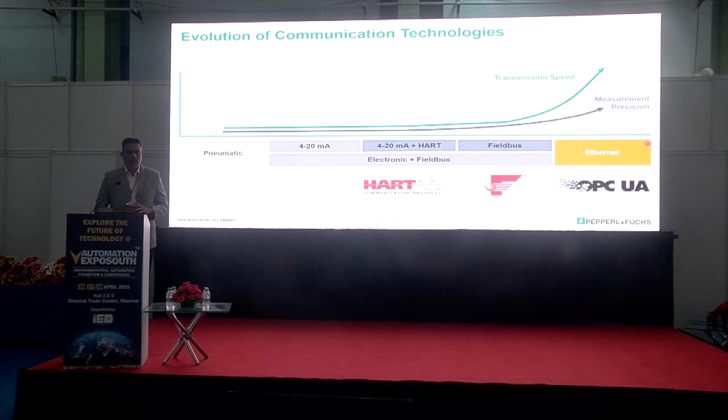This is a measurement of speed as well as measuring precision. With pneumatics, we had the starting point, with a certain transmission speed and measurement precision. As we progressed towards digitization, the precision increased, and the transmission speeds also started increasing. But with Ethernet APL technology, we are going to see a multi-fold increase in both the measurement precision and the transmission speeds.

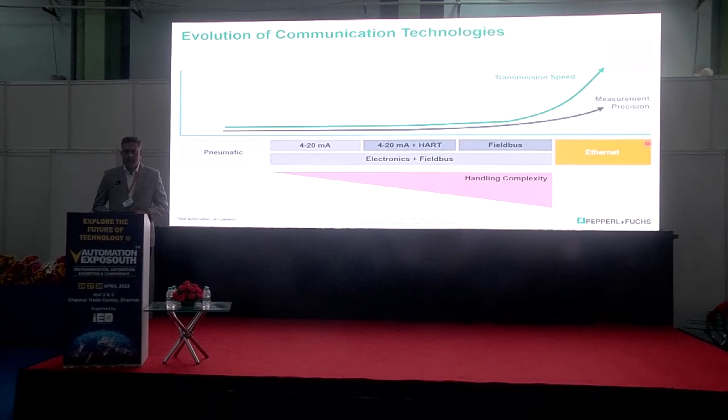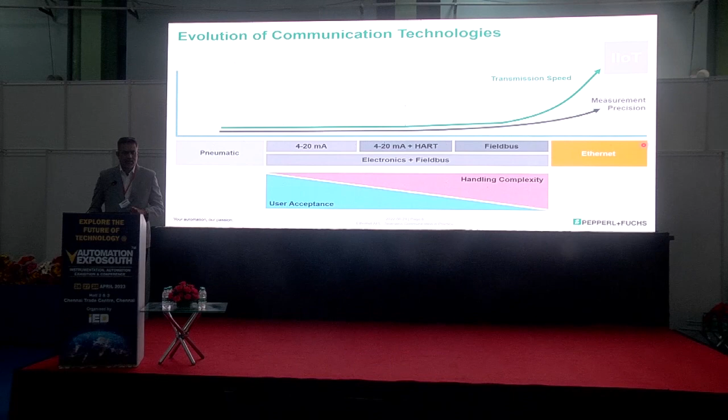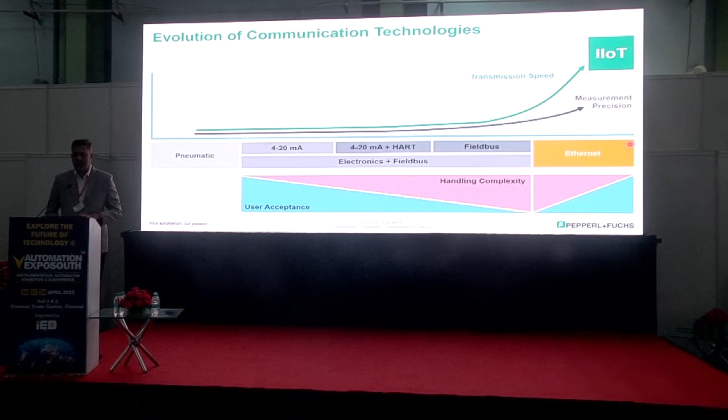As we progress technologically, the handling of devices and instrumentation started becoming complex. The user acceptance for digital technologies is going down. But with this Ethernet APL, we expect the complexities to reduce and the user acceptance to increase.

How do we do it? What are the parameters? That is what the next few slides are going to show.

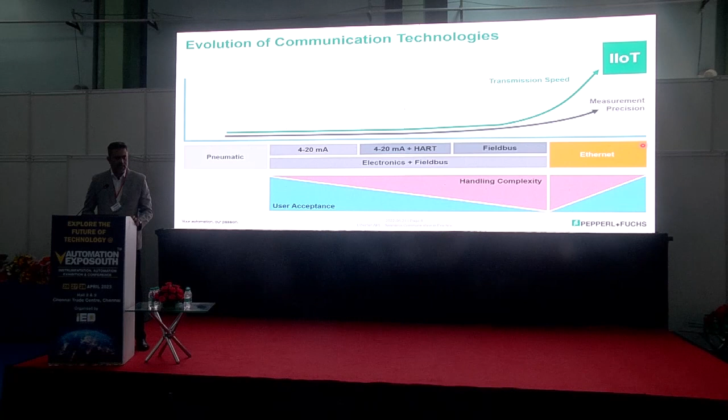So why was Ethernet not used? Industrial Ethernet has been around for the last 25 years. Why was it not used in a process control environment? So what are the process industry requirements?

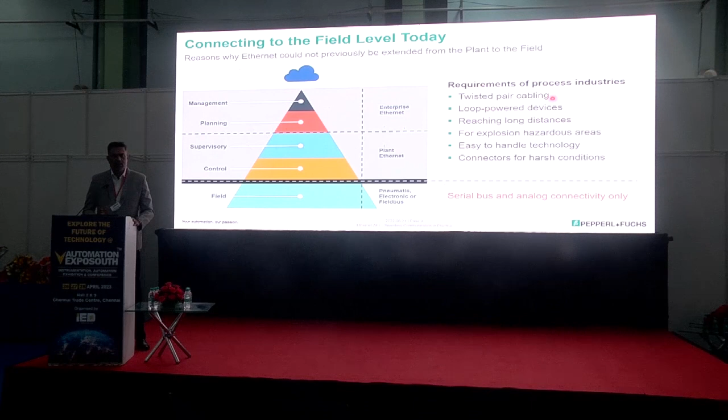We need to have twisted pair cabling. Loop powered devices are required. It has to reach long distances. It should also be able to be used in a hazardous area, that is in hazardous explosive areas. It should be an easy to handle technology, and the connectors should be suitable for harsh conditions. So this is the way we connect the devices today in a process network.

60079-47, two wires, that is called two-wire intrinsic safe Ethernet. So with these profiles, we have an industrial or commercial Ethernet converted to be used in a process industry, called Ethernet APL.

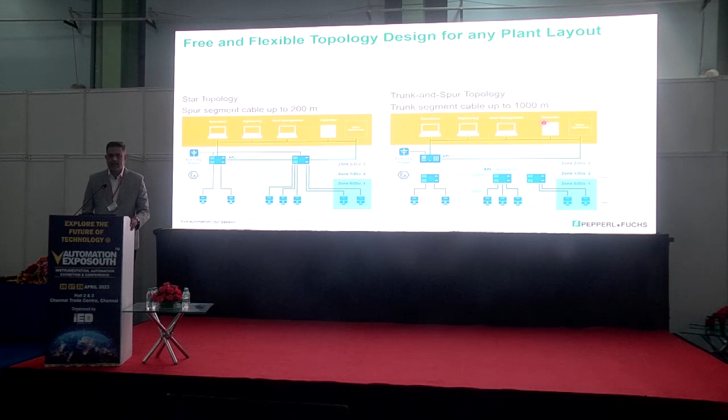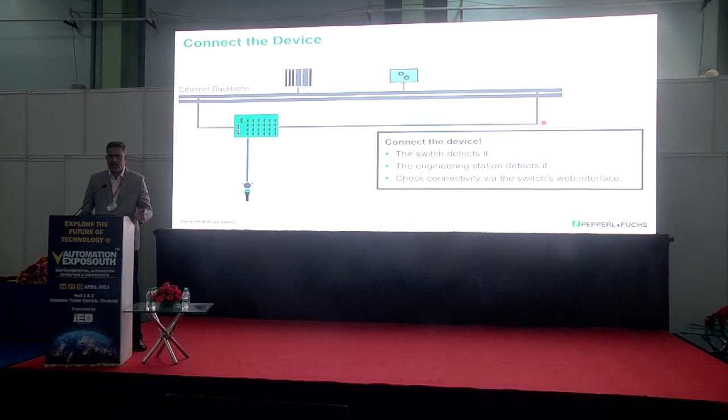No special DCS software is required. It's all coming on a web interface henceforth.

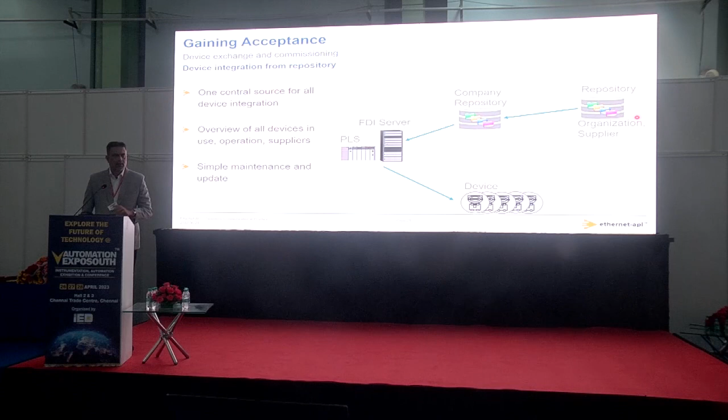It's gaining acceptance among the end users. For device integration, you have a complete single repository you can access on the Ethernet. It is used for all devices in operation as well as in use. Simple maintenance and update of the database of the field devices. So the complete device fleet can be managed in a quicker way.

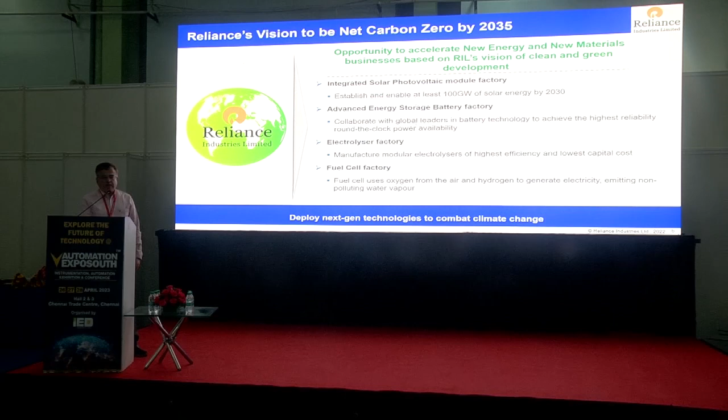We'll talk about Reliance's vision to be net carbon zero by 2035. We are putting up a solar photovoltaic module factory at Jamnagar. We are putting up advanced energy storage, battery factory, electrolyzer factory, and fuel cell factory at Reliance Jamnagar to become net carbon zero by 2035. These are the growth engines of Reliance.

Now we'll come to the technical points. We'll discuss the Reliance pain points and why we joined OPAS. As you are aware, we have multiple refineries, petrochemicals, and polyester sites across the western region of India. We have around 5,000 plus control systems working across these sites. So what were the problems we were facing with these control systems?

One is digital transformation. As we move ahead with digital transformation, it requires a lot of data from the OT system. What we found is legacy control systems are constrained because they are not able to provide the data at the required frequency and number of data points to the cloud to manage predictive maintenance or early event detection. New features cannot be introduced in the legacy system - suppose if you want to add a multivariable controller into the legacy system, it is not possible. So you have to add on some applications, or upgrade the control system.

The third point is related to frequent obsolescence of Microsoft OS. As you are aware, OS obsolescence is a big issue for OT control systems. Once it is declared obsolete, we don't have patches available for cybersecurity purposes. Then if we want to upgrade the control system, we have to upgrade it with every obsolescence of OS, and that period comes to around 5 to 7 years based on our shutdown frequency. If you upgrade all control systems in every shutdown, the capex cost is very high, and it demands that profitability is going to reduce.

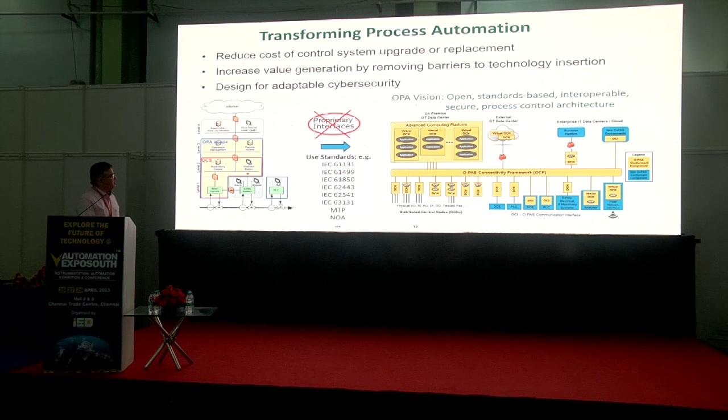So we have 100 members in the open process automation forum, with 20 plus hardware and software suppliers, 5 major DCS suppliers, 10 end user collaboration partners, and out of those 10 collaboration partners, 7 have already announced a test bed facility.

So what are the versions which OPAS has already released? Version 2.1 is the latest, which was released in 2022. Version 1 was released in 2019 with interoperability as the theme. Version 2 was released in 2020 with configuration portability as the theme. Version 2.1 was released in 2022 with control functionality as the theme.

And version 3, we have already started work on, which is going to be released either at the end of 2023 or next year, with application portability, orchestration, and physical platform as themes.

So what is application portability? It ensures end users have the ability to move their apps, whether customized, custom development, or vendor provided, from platform to platform, as well as to use any process automation software regardless of vendor. So the basic theme is, if you want to upgrade one HMI to another platform, you just take a backup and reload it into another vendor's station.

That will be completely vendor agnostic. System orchestration ensures the ability to select and implement OPAS certified products from multiple suppliers, and to be assured those products will coexist seamlessly in a unified open process automation system.

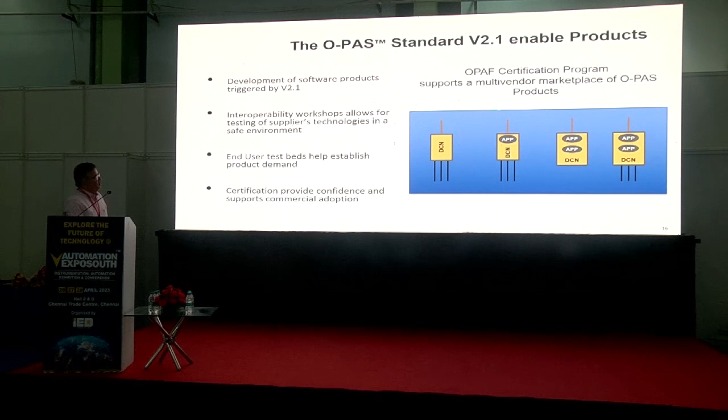So OPAS certification program supports multi-vendor marketplace for OPAS products. This is going to be released, I think, in July 2023, the first phase of OPAS certification, where formal validation process is going to be managed by Open Group, and they are going to put up third-party labs accredited by Open Group to test out the open process automation devices. Products that demonstrate conformance to 100% of the OPAS requirements receive certification and will be listed on the website.

So there are multiple interoperability tests organized by the open process automation system. There were two such events which have already taken place—one in 2019 and the second in 2022, wherein vendors sit together and test out their devices for interoperability and interconnectivity. Based on this test, they modify either their product or give input to the standards for any update or modification. 14 organizations participated in this 2022 interoperability event.

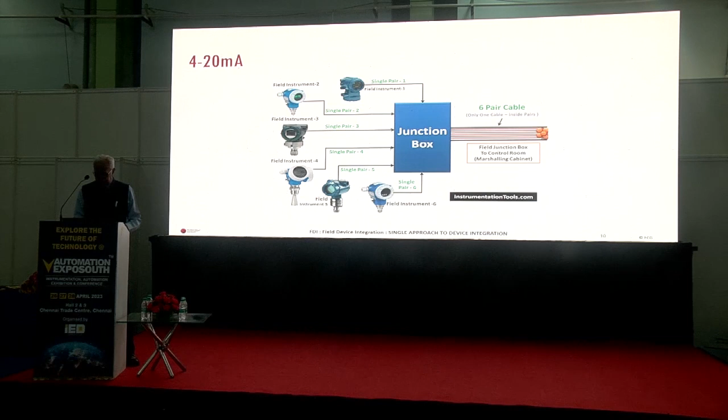Then came the days of field bus. Many devices were interconnected on the standard 2-wire cable, which was being used to power them and also to take the signal. So you had foundation field bus, Profibus, and many other standards in the play, but of course, FF outplayed many of them.

Then came the era of wireless devices, where many devices were connected to each other wirelessly, and through a router the data was sent to the control room. This was by and large for the monitoring application. Technically and technologically, it is possible to do control, but nobody would dare, because you do not want to take a chance with a process plant.

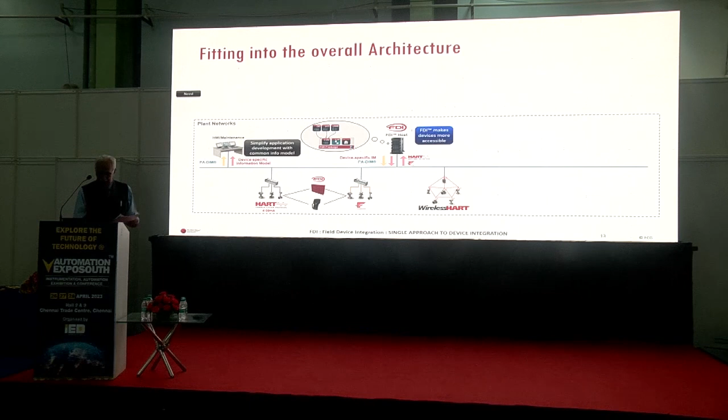And therefore, by and large, this wireless technology was used for monitoring. Now comes the bigger picture: we already have devices which were on HART or current, you had foundation field bus, you have wireless HART, but you have to integrate all of them. And when you integrate all of them, you need many things with each of the devices.

So the devices that you see here are basically from so many vendors. Reliance, Devyang talked of so many control systems, almost 2,000 plus controllers in their field. Now there are so many devices, so many control systems, all coming from different eras, different timelines, different manufacturers, different technologies, all needing to be integrated. And therefore, the need to have one system.

And remember the fact that no manufacturer or user would ever like to throw out their legacy system. It's a misconception that you can come up with a new one and throw away everything else. It doesn't happen. Whether it's a brown field or a green field, you will always see a hybrid system where you will have a mix and match of many such systems put together.

All the reason for having a good device integration. I think Devyang also talked of why do we really need these standards, why do we really need to work with this kind of new technology. Obsolescence of the Windows platform.

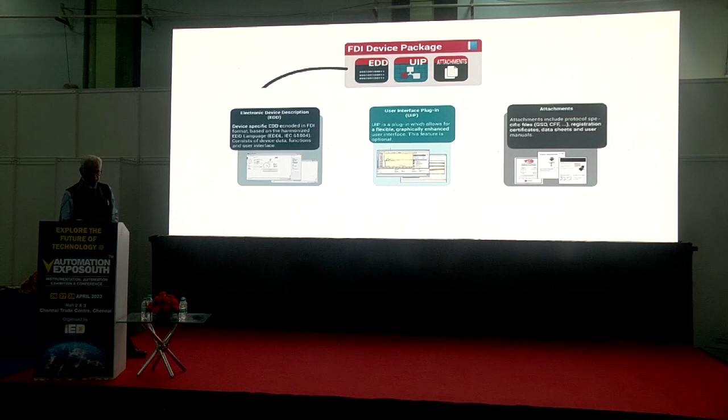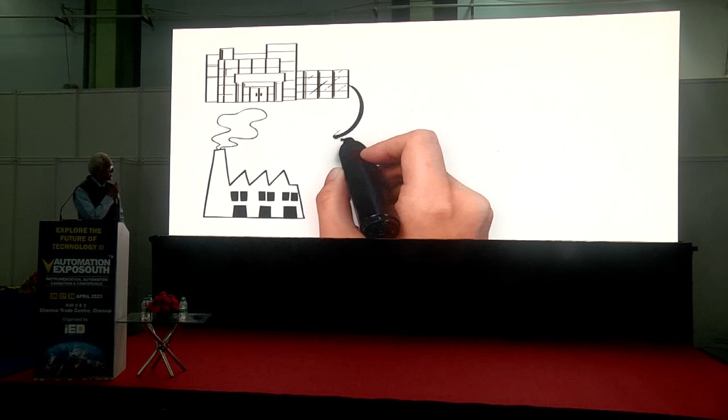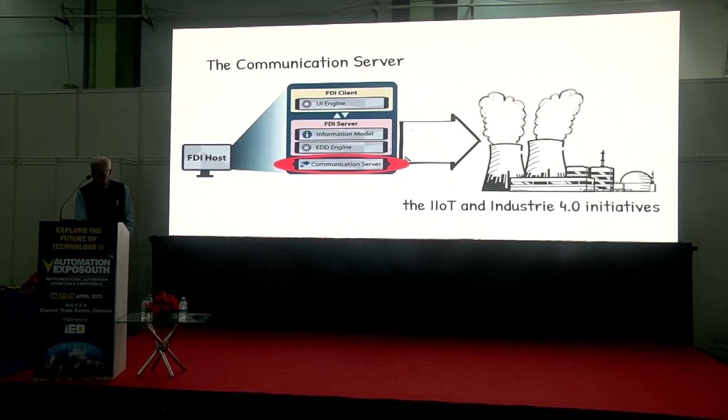FDI is an internationally standardized solution for process automation, device, and systems integration that dramatically simplifies software installation and maintenance, as well as communication between enterprise-level systems and technologies on the plant floor. Before FDI, individual devices often came with hundreds of files to address different systems, configurations, and interfaces. With FDI, a single device now uses one file to provide data and process values to all systems. An FDI system is made up of two parts: an FDI device package and a host system. The FDI device package is a standardized container of all files necessary to describe a field device to a system and a person, including the device description, user interface, and device documents such as wiring diagrams, manuals, certificates, etc. All of these elements are packaged together in a digitally signed FDI device package. An FDI host system in process control can be a DCS, PLC, an asset management application, or even a configuration tool. FDI host systems are made up of an FDI client and an FDI server. FDI hosts may also provide an OPC UA interface to field protocol communication servers, allowing disparate machines and systems to communicate. The communication server is the key element enabling FDI to be broadly adopted into IIoT and Industrie 4.0 initiatives. In particular, the server enables local or cloud-based OPC UA connections, which simplifies integration with existing IT infrastructures. FDI and OPC UA deliver access to plant data from across the globe, allowing corporate offices and subject matter experts to optimize assets and stay ahead of the competition, all while providing built-in data security. FDI and OPC UA enable the digital transformation of process plants to work more efficiently and effectively with fewer resources and tighter constraints.

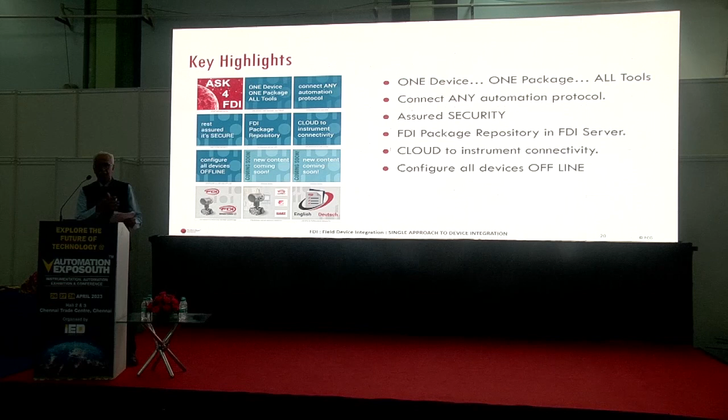The key highlights of this presentation are that you will have only one package for one device, not many, and no version numbers are required. The latest one would be downwards compatible, and anything coming from legacy systems would need to be incorporated, connecting to any communication protocol. We saw that whether it is Foundation Fieldbus, Modbus, HART, HART IP, wireless HART, or even Profibus, all of them would be contained in this one device driver package called the FDI. The FDI server, which is in the plant itself, would be a repository for all these drivers, and once connected, it picks up the data from the relevant FDI and takes it forward.

So are there host systems? Yes, there are many host systems like Emerson, ABB, Yokogawa, and many others already there. Many of these host systems are also now certified by FDI. You remember that tick mark with the FF devices? You're going to see the same thing with host systems and field devices, that this FDI is an approved and attested one from the FieldComm Group, which means you have seamless integration, seamless interoperability, and many added advantages compared to the integration challenges you normally face in the field.

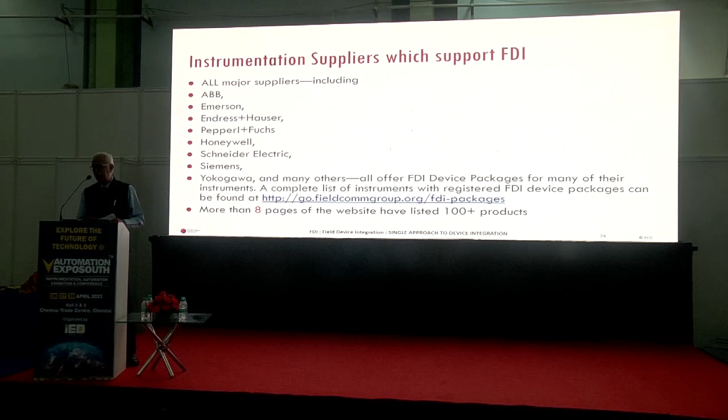Is it new, or is it only one company actually doing it? Not really. There are almost about 100 companies really into the field, into the testing labs. And for that matter, many of them have even been, you can see here that there are many of them

which are already registered with the FieldComm Group, and the testing is going on for many other host systems as well. Just some examples that many of these systems are already FDI certified. Now, this is something we just talked of a little while ago, where the data of the device, the FDI package, would come to the FDI server, a net-based server, an HTTP server, from where the data can be picked up either by the client for data analysis, for the cloud, or whatever. So just one FDI server will be able to take care of all the integration needs for a plant.

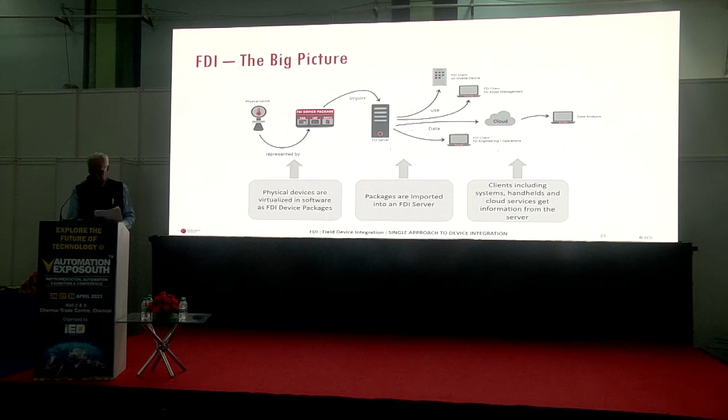The core of the FDI has 3 packages, something that you saw a little while ago. The EDDL, which is basically the machine language, tells you what the device is all about, what data it's going to give out, in what format it will give out, in what bits it will give out. So all the technical data is given by the EDDL, the electronic device description.

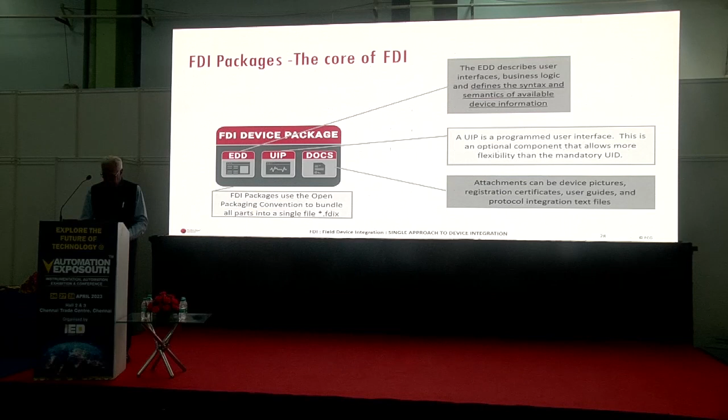The UIP is basically the software interface. If you have seen radar devices, or time-of-flight devices, you get what are known as envelope curves, reflection curves, or even for a valve, you get the signature of the valve. All those graphics will be available from this UIP package. And of course, no need to keep the manuals, no need to keep the CFF files, no need to keep the other GSD files. All the data will be available from the DOCs. That is, all the hardware data about that particular device will be available at every point of time in this FDI package.

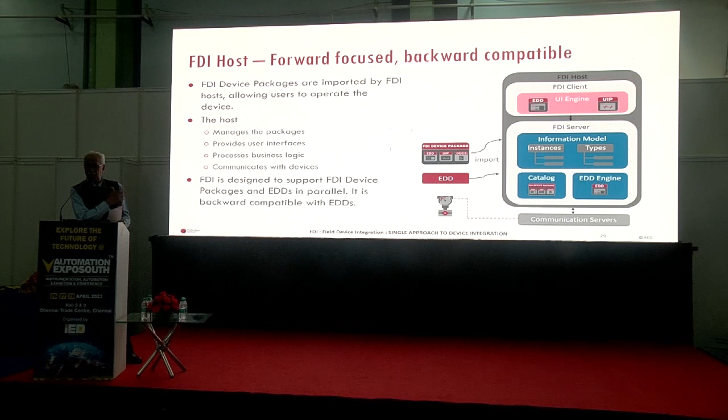So the FDI host is also forward focused, and it is backward compatible. That means once you have the latest one, all the previous devices will automatically get connected. That is the basic theme of using FDI or insisting on FDI.

There is a website called Ask for FDI, and I humbly request each one of you, please do browse through this website. It'll give you a lot of insights into what work is getting done in terms of developing these FDI packages.

Insist on a registered mark, something I just mentioned, like FF, like other devices, now you will have a red tick mark. And if the red tick mark is coming from the FieldComm Group, that means it has been tested in those work groups, something similar to what you are doing with OPAS.

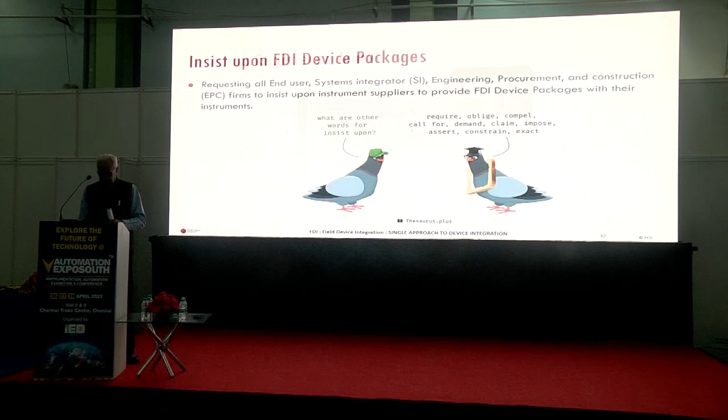There was a recent event in Singapore, where so many manufacturers had come with their devices, sitting across the table to see whether there are any bugs or issues in terms of interface, from the host systems to the control devices. So insist on FDI packages as a part of your basic need when you come to plant offerings, because only then can you be sure that the integration is seamless.

FDI also supports a NOA open architecture, that is Namur open architecture, something which has kind of become a de facto standard. Namur is basically an organization of all the chemical companies of Europe, and even others outside. So the core philosophy of Namur is please don't touch our existing system.

Build on it, by having a diode, a NOA diode, which will give the data from the field devices to a higher level, from where you can actually then connect to the OPC UA and then extract all the data.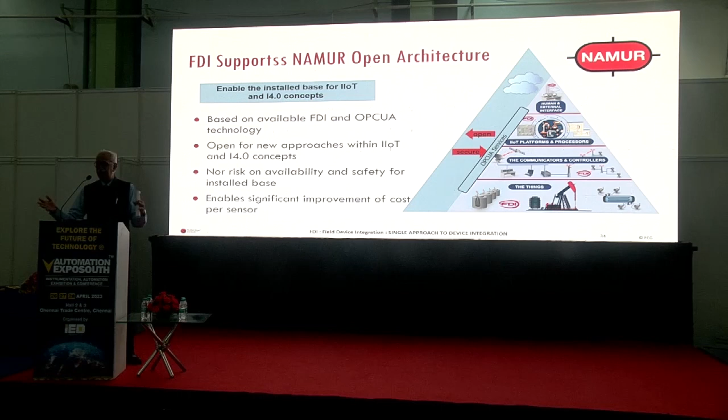And I think that's the beauty of the system, that please don't disturb my existing plant. Build on it rather than starting from scratch, which I think was very well talked of, that you cannot get rid of the legacy system, neither can you throw it off. So FDI supports this Namur open architecture, and we comply to the standards which have been given to us by Namur.

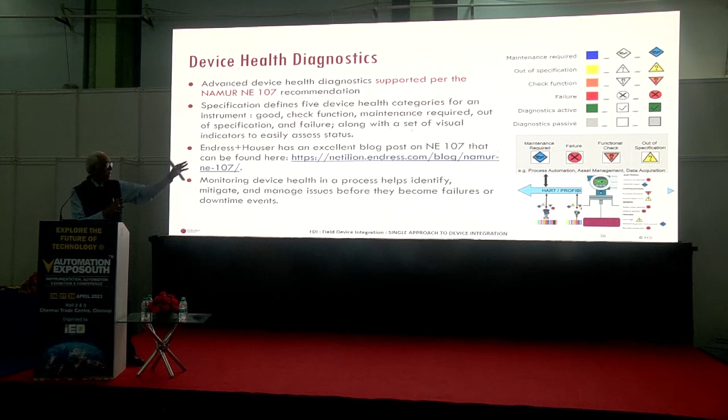Also, needless to say, the basic diagnostics, that is NE 107, and the 5 broad categories which were identified by the Namur group, these are also a part of FDI, which basically means that any device which now carries FDI has to comply to the Namur requirements which have been laid down.

There is already a working system in Germany, in Karlsruhe, where these devices are on FDI, and so is the host below. It has been tested that, yes, it works. It works very well, and only after this, many devices came into our lab for testing.

The FDI registration is open, and manufacturers, in case they are writing an FDI or a package on HART or something like that, can always write an FDI and get it certified.

There was also a working demo model in ACHEMA 2022, last year in Germany again, where many devices from various manufacturers were plugged together with FDI software packages for each of these field devices and the host, to make sure that the system is functional and is proven to one and all.

You can also log into the system. In fact, there is a YouTube video available, I can share you the link. You can even log into this particular system and play with it. You cannot erase off anything, but you will see how simple it is, and how you see the data on the live list as soon as the device is connected. You can disconnect a device, you can reconnect a device electronically. Once you do that, you will be able to see the live list and all the parameters which are visible to you from that device.

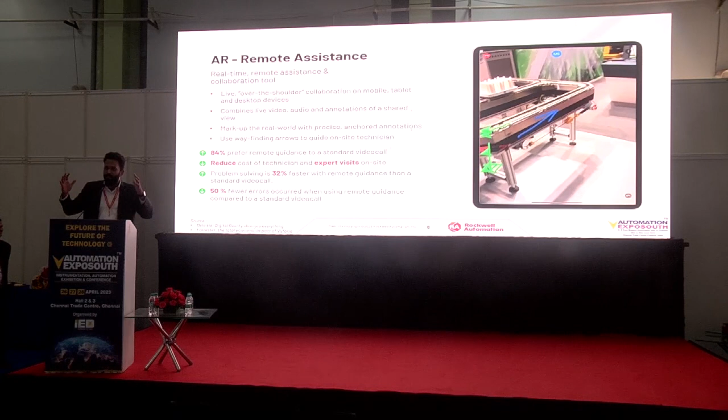So you can see here, they are doing these markings, and these markings actually stick on to the actual physical objects. It doesn't matter if you move from left to right or up to down, these markings stick on. So what is the use? You can imagine if you have a big machine and you want to communicate, and somebody is telling you to click on this particular button or this particular wire. It's very difficult to have that conversation. This technology makes it easy for you, and it will augment the normal video calling capabilities.

Studies have shown that after using this technology, 84% of people would prefer it, and we have seen faster errors getting resolved using this technology, with 50% fewer errors occurring than with normal video calling.

But using AR, you can take out the cognitive stress of reading a document and then trying it out in the field, by digitizing all that information. We can provide step-by-step procedures on how to actually work on a certain machine, and also tools that help capture the knowledge of expert technicians. Let me show you an example.

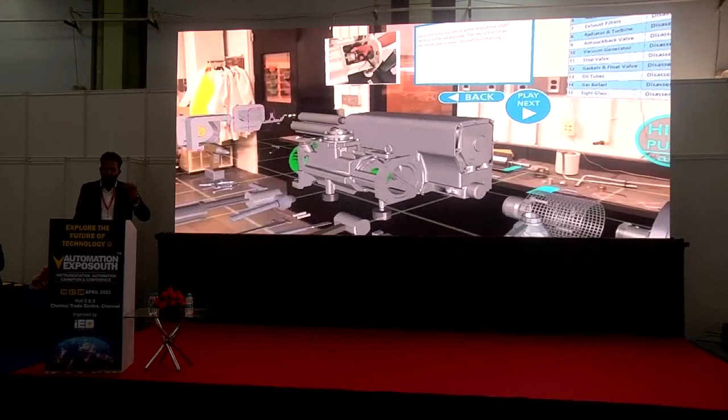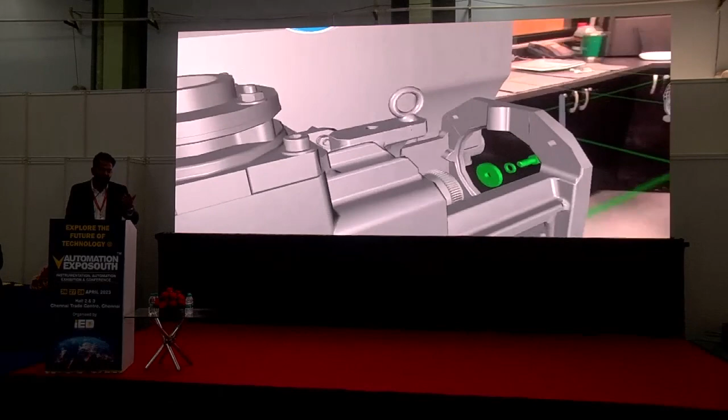In this example, a new joinee, a novice trainee on maintenance, is wearing a HoloLens and learning how to do maintenance procedures on a particular machine. Using augmented reality, we can show them each step required, what tools he needs to perform a maintenance procedure, and any supporting documents—only the required ones needed to understand that particular operation.

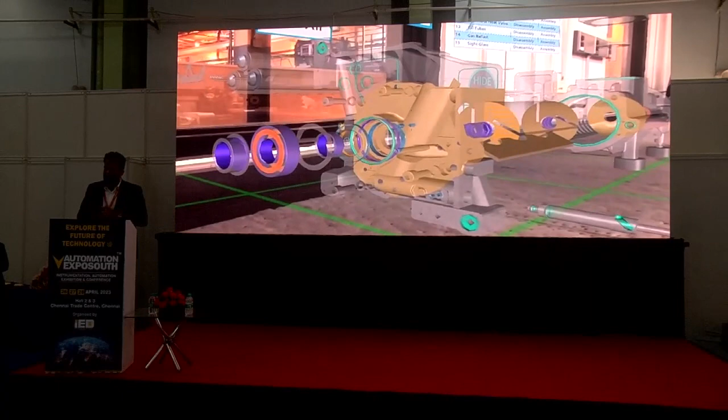We can even show the internal workings of the machines, so that the operator has a much deeper understanding of what he is doing. Like you can see here, we can also show how the machine actually works internally, what is happening inside. So all these things can be digitized and created.

Moving on to maintenance inspection. Generally, inspections happen through paper-based or manual processes—most of your PM check sheets, preventive maintenance check sheets, are done based on paper. When done manually, there's always a scenario where the technician might overlook some steps, skipping a few, and ultimately that skippage can lead to downtime.

But that's not the case in augmented reality. With AR, along with computer vision techniques, we are able to guide the operator to the exact points where he's supposed to do maintenance, and we can get confirmation whether he did it or not. For example, here I'm showing an example on a 3D printed machine. Using computer vision, we can understand what machine the operator is working on, and the first checklist item is to ensure that particular switch is on. We can get confirmation that he did that step or not.

And then we call this Pathfinder—it will help him navigate to the area where he's supposed to do the next step. Wherever he moves the tab or device, it will always guide him to the exact areas where maintenance is required. We can also include pictures and videos to help him perform that particular procedure in the exact manner if he doesn't know how.

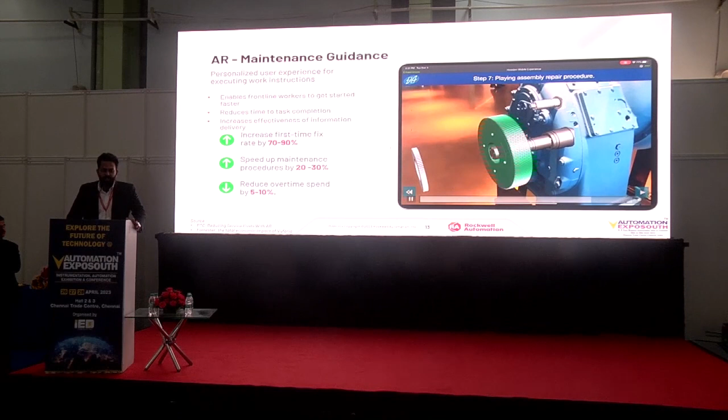This has a lot of advantages. We can increase the first-time fix rates up to 70 to 90%, reduce the maintenance procedure time by 20 to 30%, and usually the overtime working can also be reduced by a certain amount.

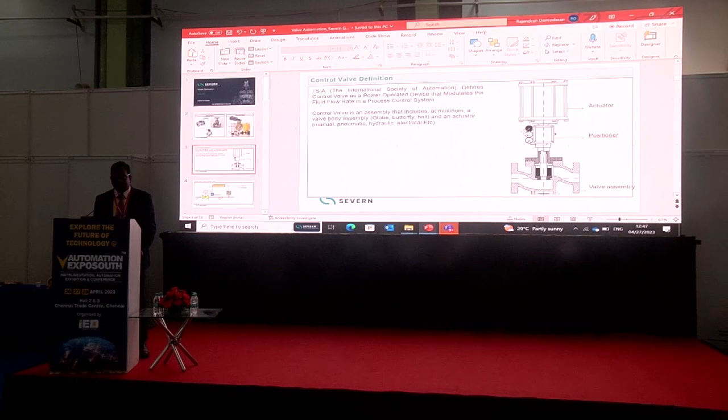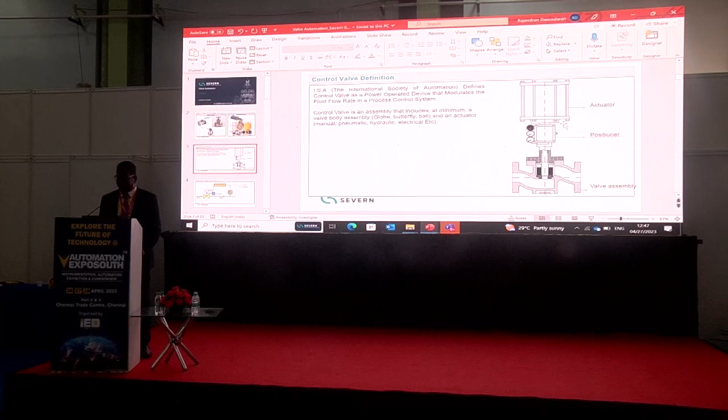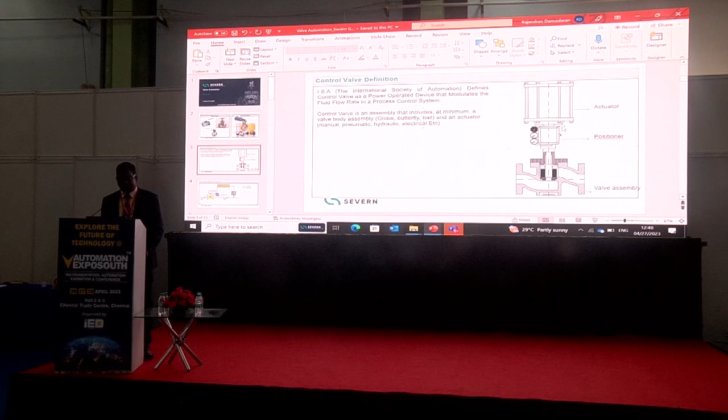Then there is a pneumatic actuator and a positioner. Without a positioner, the actuator can be used as an on-off valve. Once we give air supply or any mode of power supply to the actuator, the valve can open and close. But when we add a positioner to it, the positioner acts as a smart instrument which controls the amount of air going inside the actuator, so that the valve can be throttled at various positions, like 10% opening, 50% opening, or whatsoever, as per the command signal from the DCS. Without a positioner, by using a solenoid valve, this can be operated as either on or off.

This is a simple control loop to explain the automation requirement, where it is designed to reduce pressure in the line from 20 bar to 10 bar, using a control valve. This downstream pressure after the valve is sensed by a pressure transmitter, and that pressure transmitter gives a signal to the controller, and the controller gives a 4 to 20 milliampere signal to the positioner. Either it can be a 4 to 20 milliampere electric signal, or HART, Foundation Fieldbus, Profibus signals, as per the communication protocol available at site.

Then this positioner takes an instrument air supply, and based on the controller signal, the air supply pressure is modified and sent inside the actuator so that the valve can open and close and be throttled in mid position. For example, when the downstream pressure is lower than 10 bar, immediately the pressure transmitter senses and gives a signal to open the valve. Thereby the valve allows more flow across it, and the increased flow results in increased pressure, until the desired set pressure of 10 bar is achieved.

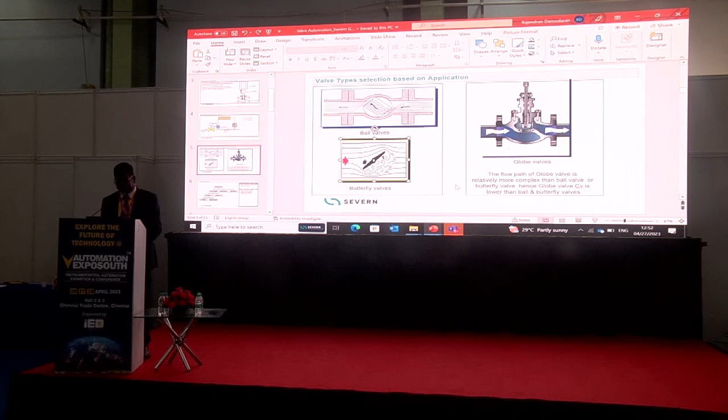Actuators can be broadly categorized into pneumatic actuator, hydraulic actuator, and electric actuator. Pneumatic actuator is the most used in process industries, and it can be categorized into linear and rotary type. Linear can again be categorized as piston type and spring and diaphragm type. Rotary actuators can be further categorized based on design and components used, either rack and pinion actuators, Scotch yoke actuators, vane type, and helical type actuators.

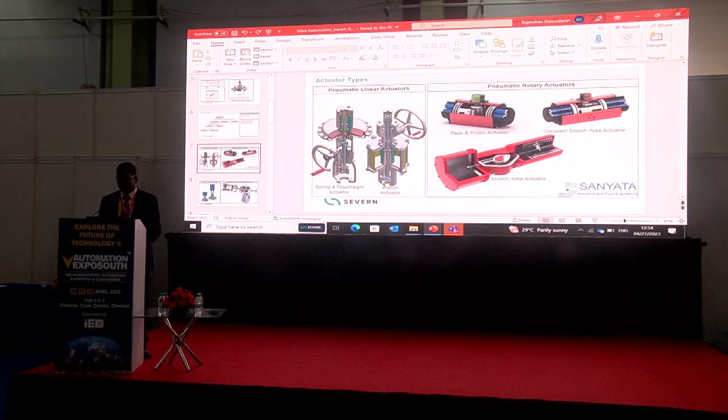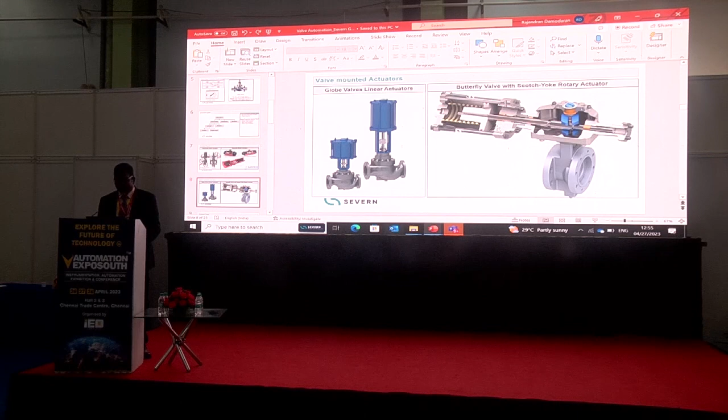Then we have hydraulic actuator, which is in construction very similar to pneumatic actuator. Instead of pneumatic supply air, we use hydraulic oil. So the actuator has an inbuilt hydraulic reservoir with an inherent pump and motor. That pump and motor system increases the pressure of the oil and then sends it within the actuator cylinder. Thereby, hydraulic actuators are used to generate a very high amount of force compared to pneumatic actuators. Pneumatic actuators generally use actuating media with a pressure of 4 bar or 5 bar as per the instrument header pressure in the process plants, whereas hydraulic oil can be pressurized up to 200 bar.

Thereby, it can produce a very high amount of force.

Then we have another type of actuator, the electrical actuator. There is no actuating medium here like pneumatic or hydraulic; just a motor supply, power supply runs the motor shaft, and that shaft is connected to the valve shaft or stem with gear arrangements, so that the motor actuation can directly actuate the valve. The only disadvantage with this system is there is no spring force or backup force available to drive the valve to fail-safe position in electrical actuators, whereas in pneumatic or hydraulic, there can always be a spring which will drive the valve to fail-safe position. So mostly electrical actuators are fail-stay put actuators.

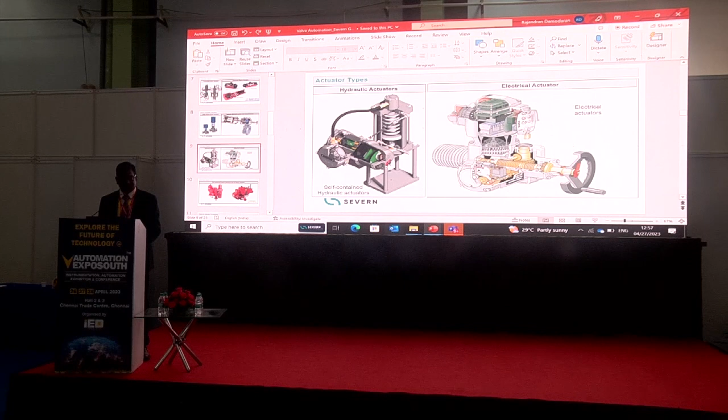These are some of the self-contained electrohydraulic actuator types for linear valves and rotary valves.

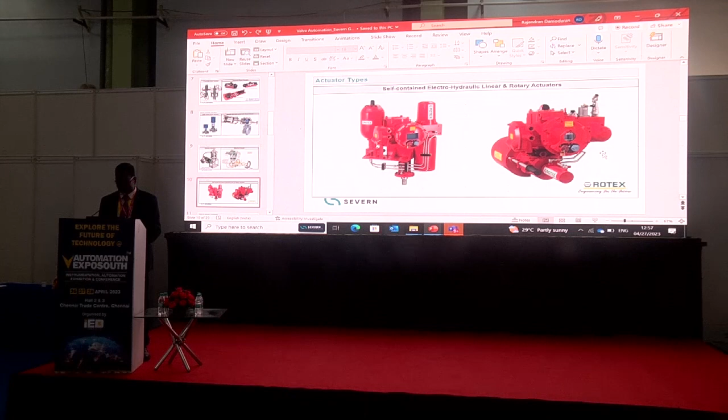Complete cut section of the valve and actuator pictorial representation. Up to this part, this is the actuator. It sits on the valve, where any movement in the actuator will pull the valve plug by this stem connector or stem coupler. Thereby, the valve plug can move up and down to control the process fluid, or to shut off or open the valve.

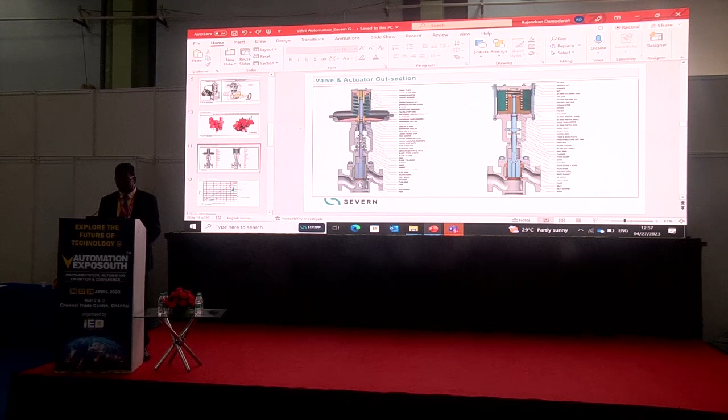This is the trim flow characteristics, because in automation, valve characterization is also required - flow characterization. When we open the valve for 20% opening, if we get 20% flow, and if it is a linear increment like this, for example at 50% of valve opening when we get 50% flow, this is called linear flow characteristics.

Then quick opening characteristics: the moment we open the valve for even 20%, it allows more than 60% of its total flow rate. This is quick opening or on-off flow characteristics.

Then one more characteristic with a wide rangeability is equal percentage characteristics. Even when we open the valve to 40% opening, it allows fluid less than 25% of its total flow rate. Thereby, this trim flow characteristics is widely demanded by most process applications because it can handle a very high rangeability.

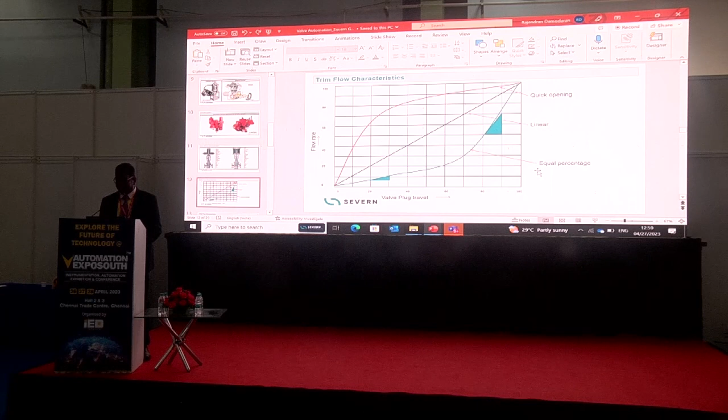How do we achieve these different flow characteristics in the valve? Within the valve, when we have a flat plug and seat, the moment the plug is lifted from its seat, it allows the entire process fluid to pass from upstream to downstream. That is how quick opening characteristic is designed in the valve internals.

Whereas in linear characteristics, the plug has a contour profile. That profile allows only a controlled amount of fluid to pass through the valve. Even when the plug is opened almost 50% of its total opening - because this is the seating area in the plug, from its seat it is almost 50% open of its total flow rate - still it allows only the controlled amount of flow to happen through the valve.

This is linear characteristics. In equal percentage characteristics, the contour profile is further designed to control or allow only a limited amount of fluid to pass through, compared to linear flow characteristics. That is how equal percentage characteristics is designed in the control valve. When we look at the graph, this is linear, this is equal percent, this is quick opening. We achieve these different flow characteristics by designing the trims differently.

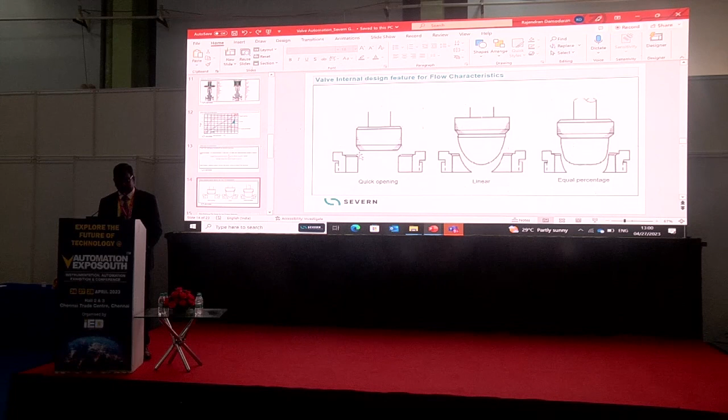Valves will also have multi-stage trim designs for high pressure reduction. These are the simple cage valves for very low pressure reduction. Then drilled hole cages to diffuse the process fluid into multiple small streams, thereby killing the energy in a better way. Then we have multi-stage pressure reduction.

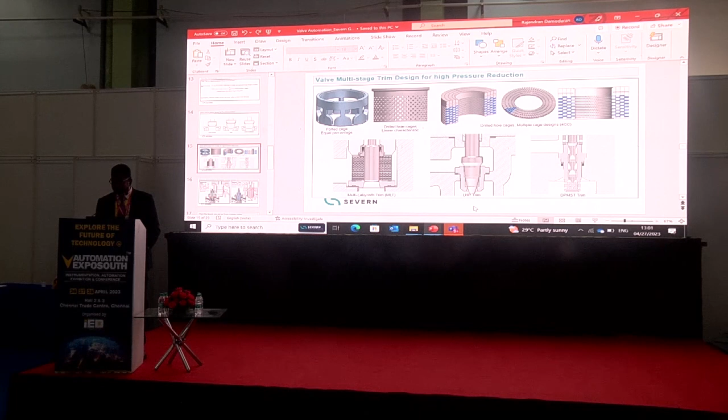For example, we want to reduce the pressure from 300 bar to atmospheric pressure in a single valve. Then we need a sophisticated flow control trim like this, so the pressure is reduced step by step. Then we have multi-labyrinth trim for very high pressure reduction, and further stepped trims like this. Then pressure-balanced design facilitating a compact actuator.

This is a very simple and standard control valve trim component generally used. But the problem with this unbalanced design is that when the process fluid pressure is very high, this process pressure can probably lift the plug, or else we need a very strong actuator to sit on the plug - strong in the sense that the air supply or power supply to the actuator should be very high, or the actuator area should be disproportionately very large compared to the valve.

To overcome this, we move to balanced design of valve, where when the valve is in the fully closed position, the fluid pressure passes through the balancing hole and stays at the top of the plug. Even if we consider 100 bar or 200 bar pressure acting upward - in the unbalanced case that 200 bar pressure was lifting the plug - whereas here, the same 200 bar pressure passes through the balancing hole and stays at the top of the plug. So the pressure is balanced in both directions, upward as well as downward. Thereby the pressure unbalance force is balanced here, so a smaller or compact actuator can control this kind of design.

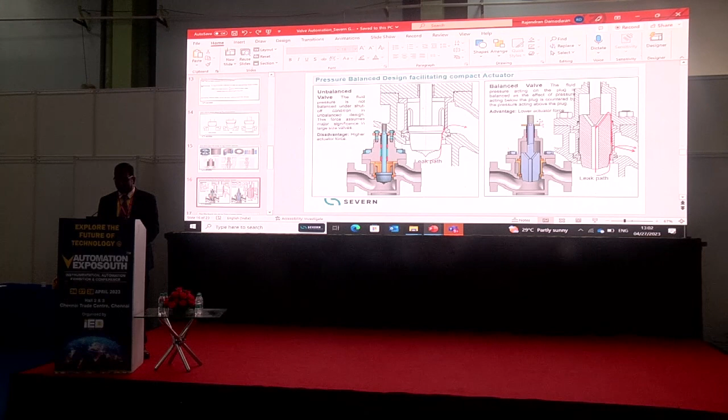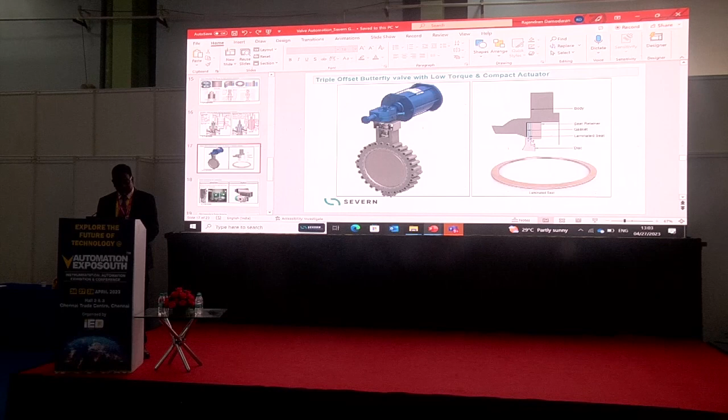Similarly, in butterfly valve applications, to reduce valve torque, triple eccentric valves are designed so that the valve can easily break away from its seat and have a very smooth contact with the seat when in full shut-off condition. Thereby, it gives a better shut-off class.

These are the valve accessories for automation. For on-off valves, solenoid valves are used to allow or cut off instrument air into the actuator so the valve can be in open or closed position. In control applications, positioners are used in place of solenoid valves, because for on-off valves we intend to either give or cut power supply to the actuator, whereas in control valves we want to throttle the valve by modifying the airflow into the actuator.

Then positioners are used - pneumatic positioners with HART protocol, foundation fieldbus protocol, or conventional 4 to 20 milliampere control system.

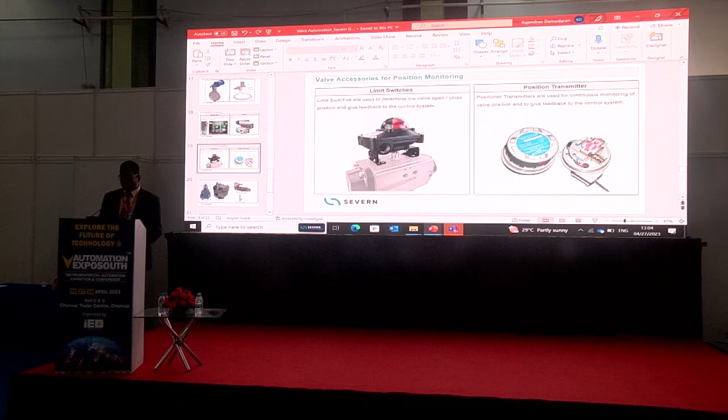Then we have limit switches to monitor the position of the on-off valve, to understand whether it is in closed or open position. Then we have a position transmitter which continuously senses the valve stem position and gives feedback about the valve's open, closed, and intermediate positions.

And we have further accessories in valve automation: air filter regulators to filter and clean the instrument air just prior to the valve or actuator. Volume boosters are used to multiply the volume of air going into the actuator for fast opening and closing. Pressure relief valves release excess pressure to safeguard the valve accessories and diaphragm. And solenoid valves with integrated spool valves facilitate high flow of actuating air in on-off valve applications.

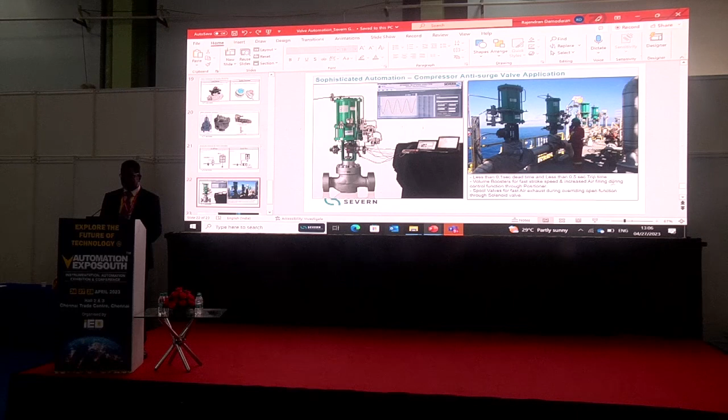This is a sophisticated automation system followed in compressor anti-surge valves, where the actuator has multiple accessories including air filter regulator, positioner, volume booster and spool valves, so the valve can operate within 0.1 second dead time and less than 0.5 seconds trip time, which is the requirement of compressor anti-surge applications in many cases.

Thank you very much for your time. In this short duration, we could just present you the glimpses. If you want to understand more about valve applications, please reach out to us. We are happy to come and conduct a presentation at your premises.